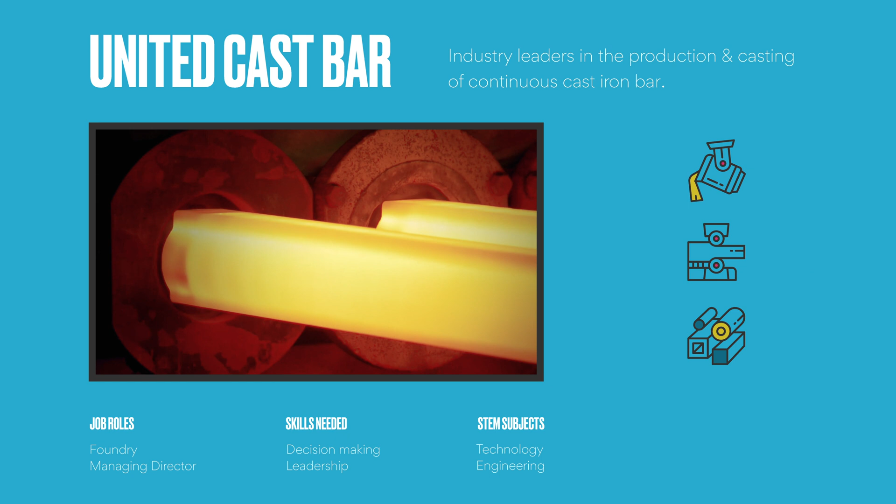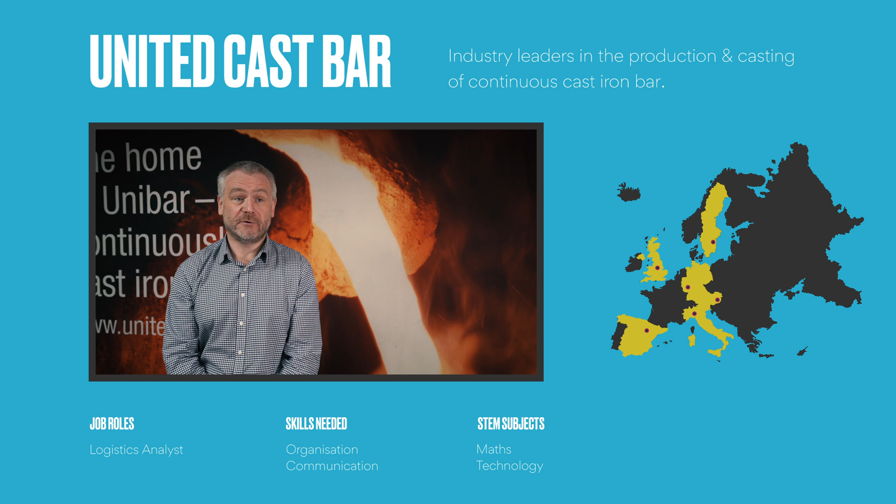We've got two manufacturing sites, one here in Chesterfield and one in northern Spain in Zaragoza. We've also got a warehouse and a distribution outlet in pretty much every country across Europe. Most of what we make here, we're selling overseas. 90% of what we're making is going to export. The other 10% is staying within the home market.

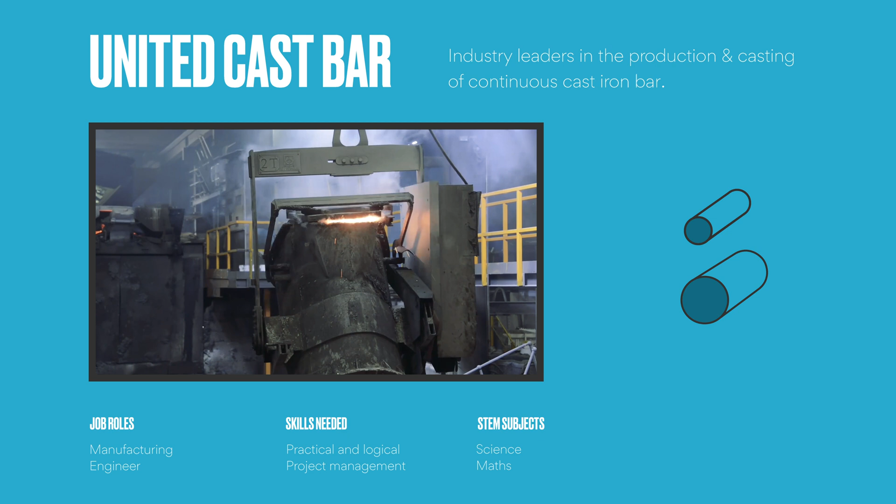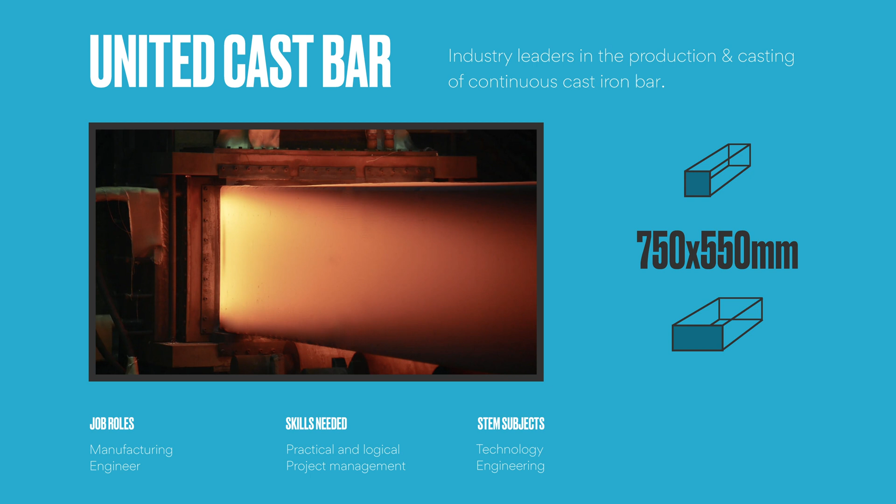We've got the broadest and the biggest portfolio of anybody within the world within our peer group. We're making bar from 25mm diameter all the way through to 700mm diameter, and squares and rectangles all the way from 40 by 20 all the way through to 750 by 550, 650 by 510, 535 square.

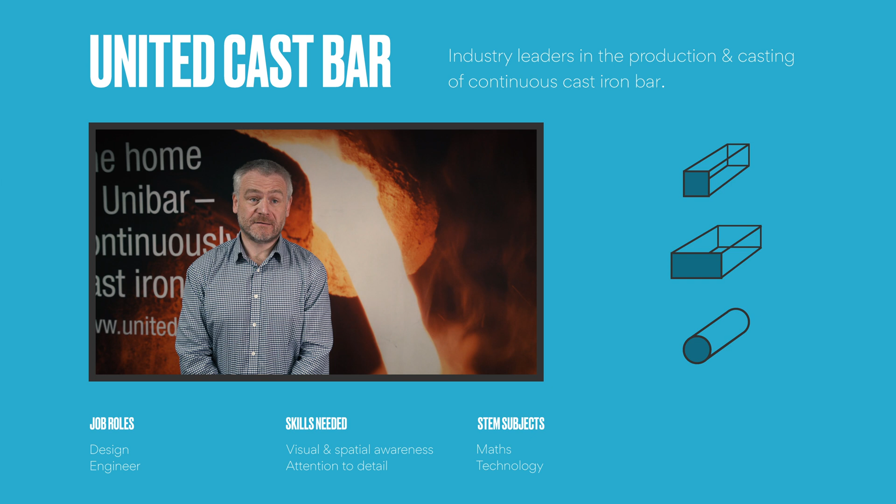We also make and have pioneered making different profiles and different shapes. So other than squares and rectangles and rounds, we're also making clover leaves and near net shape production for our customers.

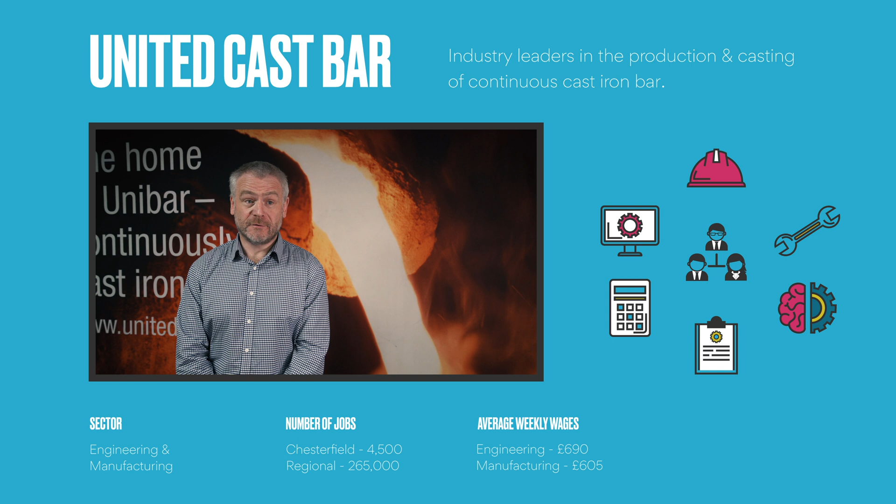Here at United Cast Bar, we've got a plethora of roles available for people coming straight from school or straight from university to come and work in. Obviously, United Cast Bar is selling material all over the world, not just here within the UK. We need people with languages.

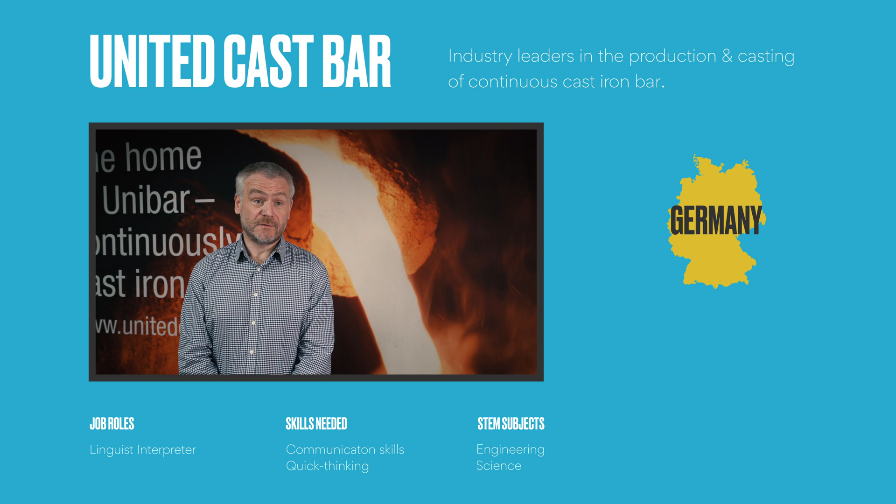Our biggest market that we're selling to is Germany. We have German speakers. We deal a lot with our sister company in Spain. We've got a Spanish speaker. One of our other biggest markets is Italian. We've got an Italian speaker.

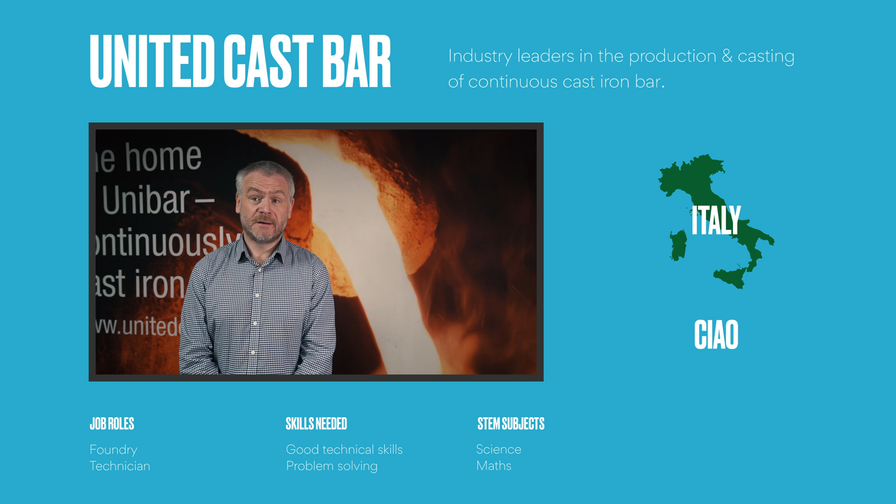We also need not just the workers on the shop floor working on the casting lines, but we're also needing accountants, HR, salespeople. We need people that can manage IT.

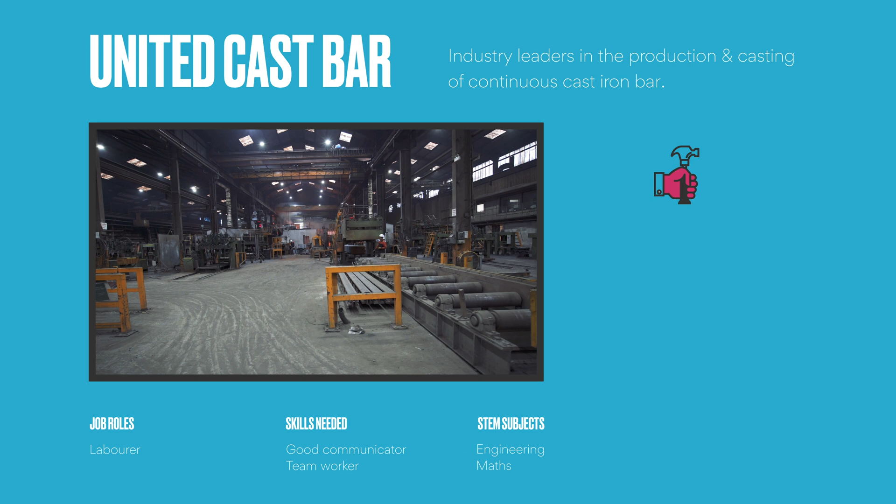Out on the shop floor, we've got a plethora of roles that we need to fulfil and satisfy. Those are from working on the end of the casting lines in simple labouring jobs all the way through to production metallurgists and supervisors. We need engineers doing design work on new profiles and new systems that we want to use in our production process.

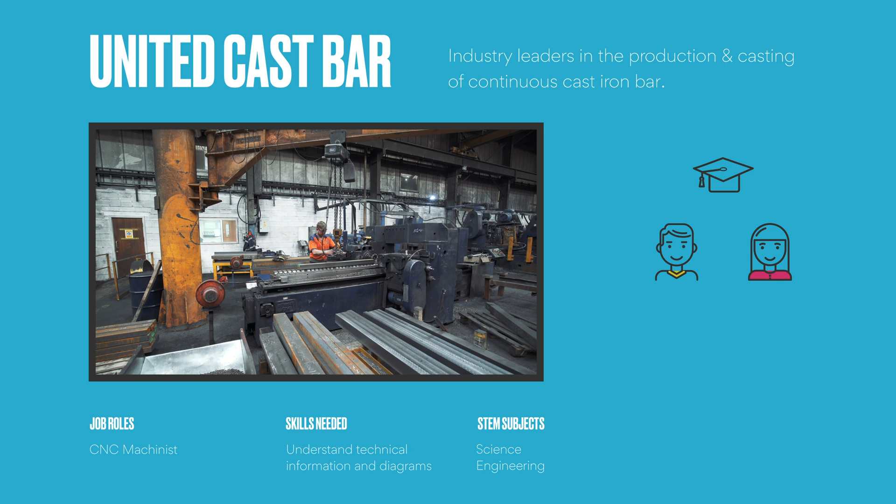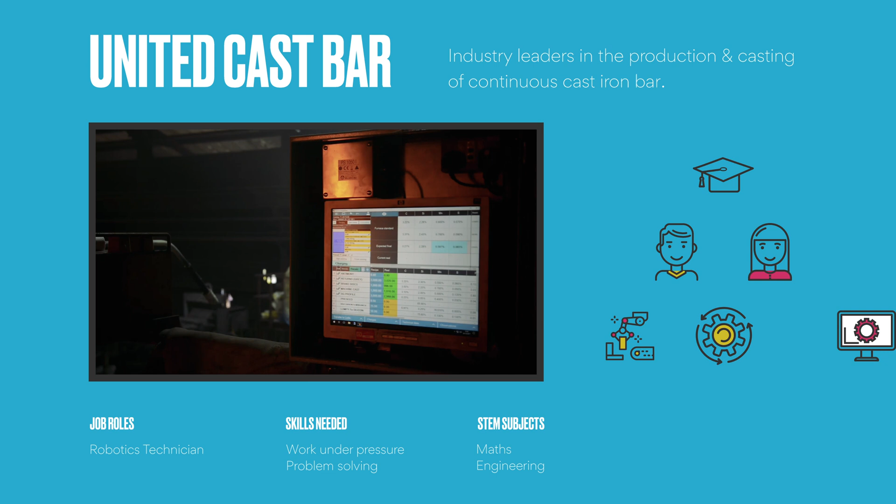We need CNC machine operators. We take on apprentices every year to work not just in the maintenance department, but also looking at all of the new techniques that are needed for robotisation, automatisation and digitalisation of our process as we move forward into the future.

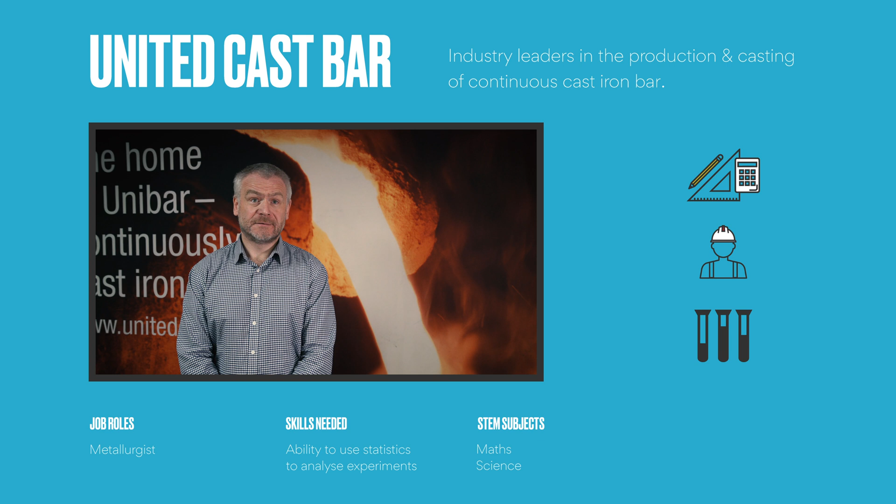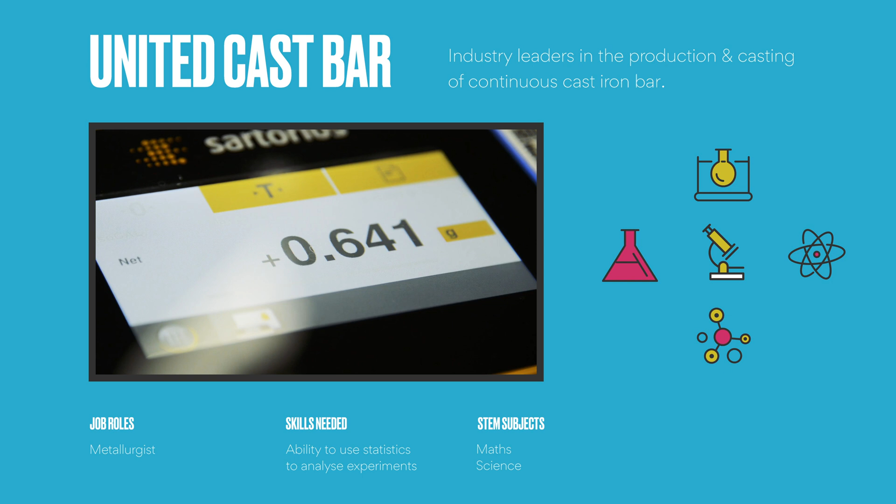We certainly need a lot of people that understand basic maths, the sciences. In metallurgy, for example, where we play around with different chemical analysis and we have to calculate different chemical formulas to achieve the required products that we're trying to make.

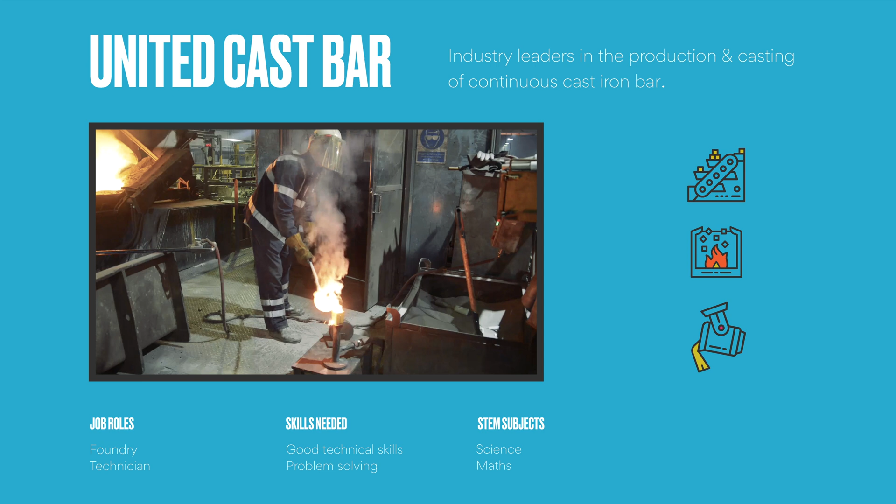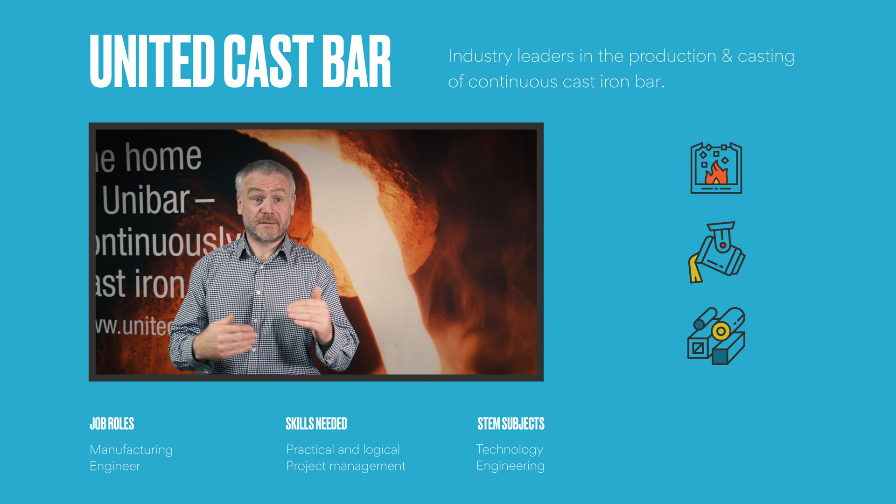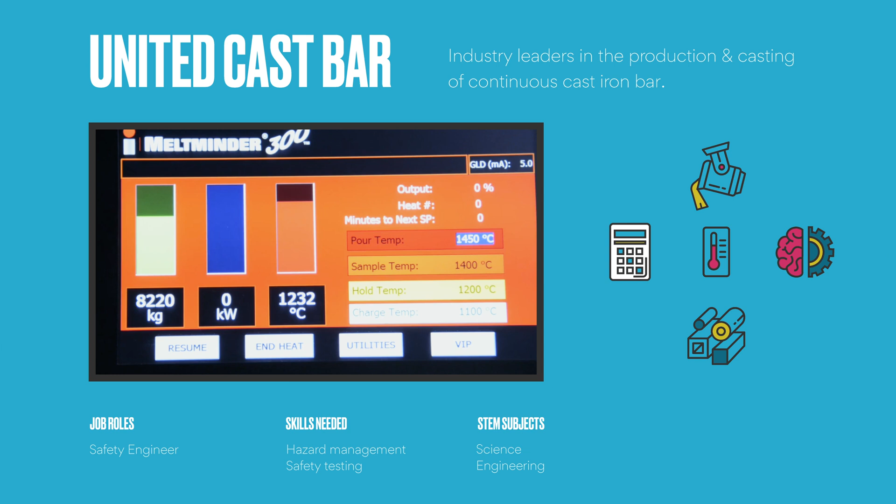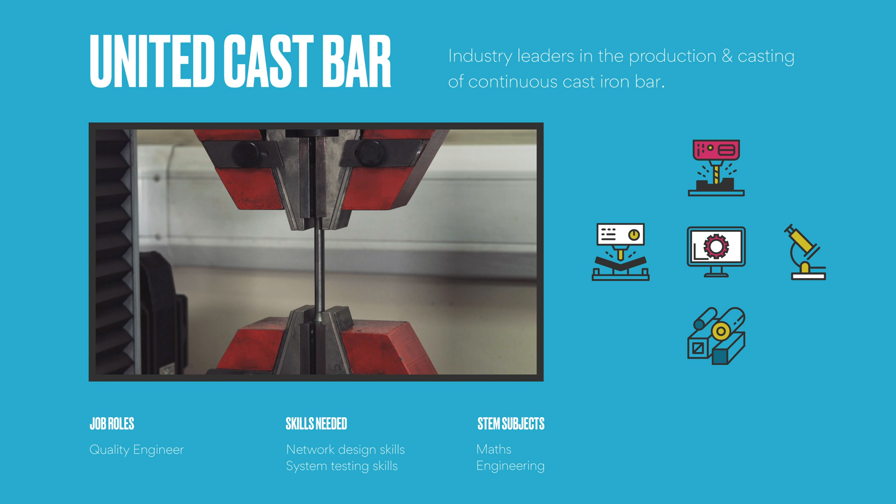Once we've made the product, we have to calculate the cooling temperatures that help us actually take our material from liquid to solid. And then once we've actually made the material, we have to test it. So we have to machine it and pull it apart and make sure that we understand how strong it is and how tough it is, to be able to give to our customers to work safely and operate safely in the application the material is going to be used in.